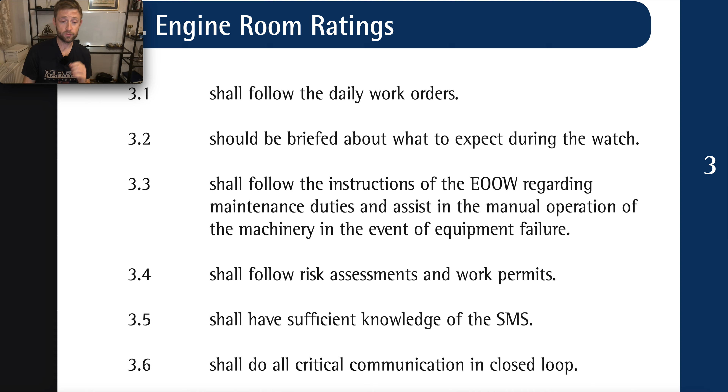3.5, engine room ratings should have sufficient knowledge of SMS. SMS knowledge is always available - it's about the level of motivation each individual has to read it. I know there's a lot of information, but take your time, step by step, one thing per day is more than enough.

By years, if you're still in this industry, you will have built knowledge and a set of skills that will give you a better understanding of why we do things, and how we're able to create less risky activities - improving, identifying things on the ground, and having clear structured communication between the people assigned for a specific job.

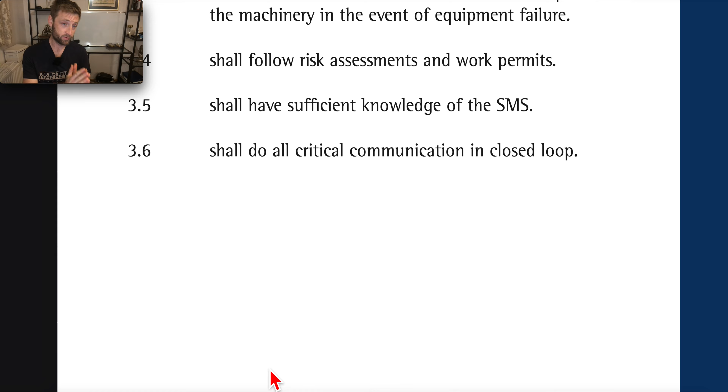Engine room ratings shall do critical communication in closed loop.

Let's go a little bit down. Whoop, okay. Let's continue - engine room crew.

All members in the engine room crew shall be familiar with their assigned duties. In addition, every member should at least have knowledge of the use of appropriate internal communication systems, like phones, information, escape routes from machinery spaces, the location and use of all types of firefighting equipment, engine room alarms, damage control gear in the machinery spaces, together with their use and the various safety precautions to be observed. That's a huge variety of equipment that has to be learned.

Also, a very good thing is that senior officers take part in continuous training, showing the things, explaining how they are and for what reason, and creating an atmosphere where all members feel valued and their voice is heard. This is very important, so everyone can ask freely without fear that not knowing will have some negative impact.

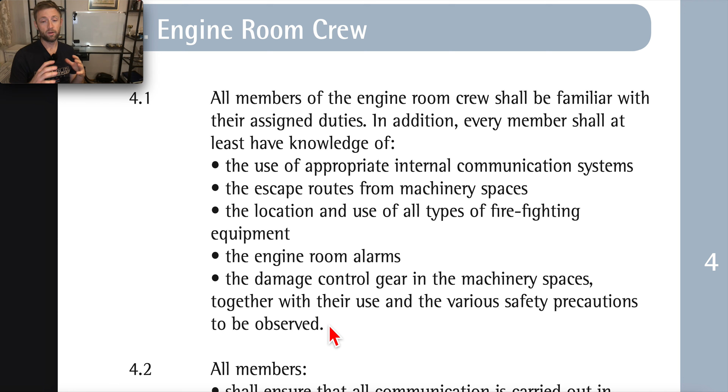Let's go to 4.2. All members shall ensure that all communication is carried out in a closed loop and shall always comply with the chief engineer's standing orders. One of the things I have seen is that the clearer standing orders and special orders, more to the point and not generic, the much better the setup of the team and all the members will be.

So it should be clear exactly what they have to do in each individual situation, in the daily activities, the reporting system. And it's very important to give each and every individual, all the members, a discussion about how they see it. Are they able to do that? Do they feel fine with that? That brings clarity to all the members, and they are also able to give you feedback.

So I believe it should be open and transparent communication with all the members, without fear, like we are talking at home, okay? Even if they are strangers, we should create a place where we feel like, let's say, a family.

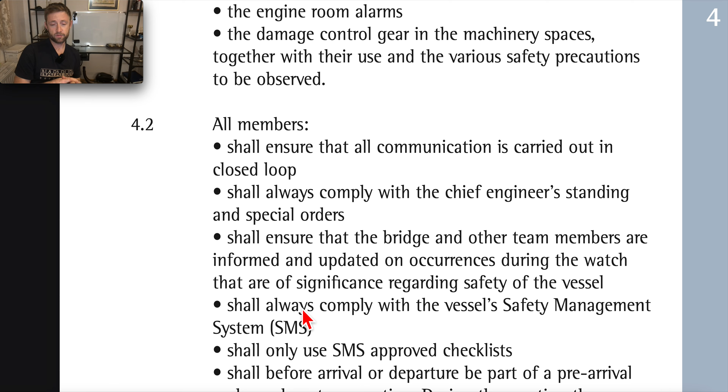So all members shall ensure that the bridge and other team members are informed and updated on occurrences during the watch that are significant regarding the safety of the vessel, shall always comply with the vessel safety management system, and shall always use SMS-approved checklists. Yes, the checklist should be approved, this is very critical. Do not create your own checklist, that creates additional work and it's not required.

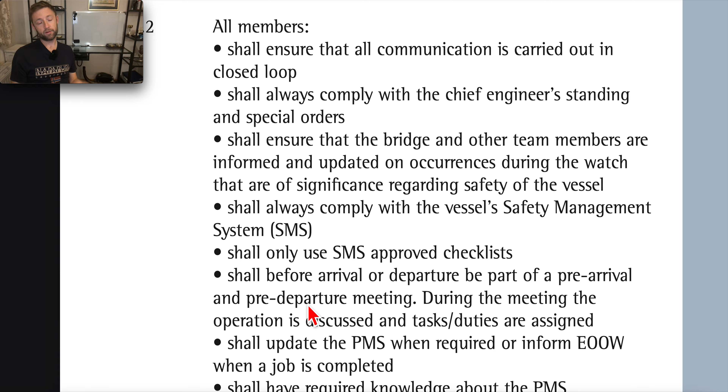All members shall, before arrival or departure, be part of the pre-arrival and pre-departure meeting, so everything should be discussed. During the meeting, the operation is discussed and the tasks and duties are assigned. They should have a clear understanding of what they will do and where they will be positioned. And I have seen that the clearer the discussion made with all the members, the clearer their understanding of what the operation will be, what they have to do, how long it will take, what to do next. The workflow becomes much better, much safer, much more transparent, and we only have benefits from that way of working.

Shall update the PMS. All members shall update the PMS when required, or inform the engineer officers when a job is completed. So if the job is completed, the engineer officer is informed and will have some passwords. From my side, I believe everyone should know the PMS system and everyone should have access to it, so they start to learn and introduce themselves to how a PMS system works, how they can see the jobs, and gain better understanding, because a well-structured PMS system also has instructions on how to do the job, and all the necessary documentation required to create all the permits and assessments. So I believe a well-structured PMS system will also be the integration of the SMS, of what the SMS says.

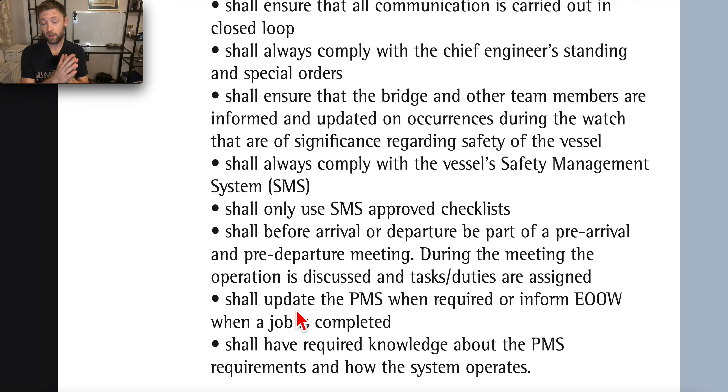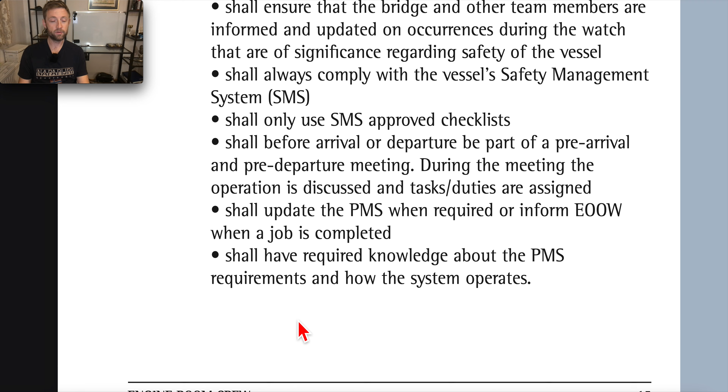All members should have required knowledge about PMS requirements and how the system operates. I believe it is continuous training. The training does not stop. Since you are there, in any kind of company, whether onshore, on board, or in manufacturing, you never stop learning.

It is a continuous set of training sessions and discussions between the members, between the crew, that will create a space of shared experience, shared knowledge, and this will boost everyone to a better understanding and getting the feedback that is so required in order to improve the systems that we are building.

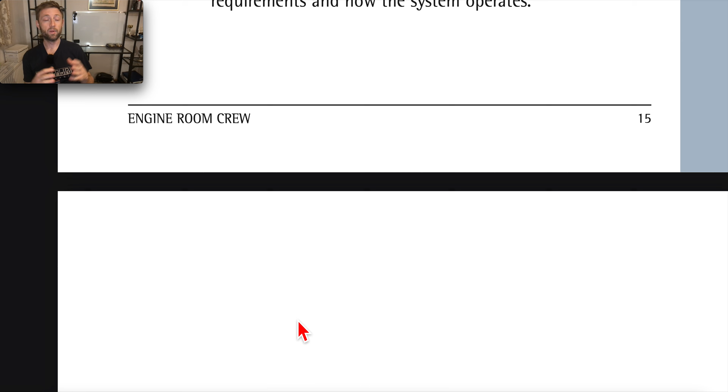Because without the proper feedback, without a reversal flow of information, we are not building a system which is continuously improving. We are building just a system of authority, which we do not like. We are not living in the 19th century. We are progressing, and the systems nowadays require a much more broad way of understanding things. It needs flexibility, it needs additional resources which can only thrive in this kind of structure.

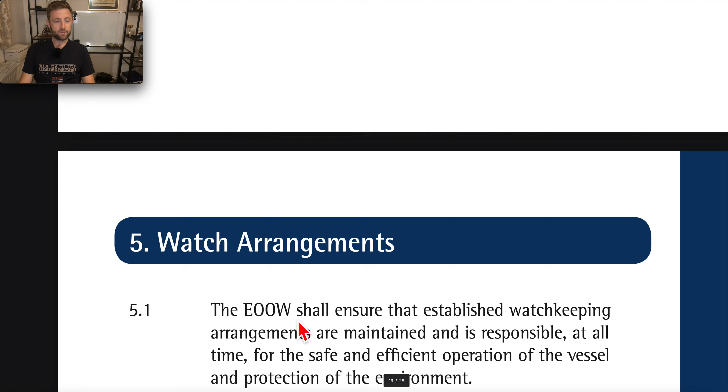So let's see about the watch arrangements. The engineer officer on watch should ensure that established watchkeeping arrangements are maintained, and is responsible at all times for the safe and efficient operation of the vessel and protection of the environment.

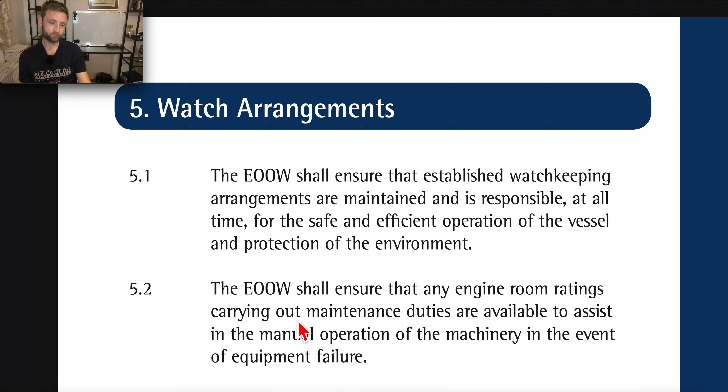5.2, the engineer officer on watch shall ensure that any engine room ratings carrying out maintenance duties are available to assist in the manual operation of machinery in the event of equipment failure.

And that's the reason why you should teach the person working with you, so they will be familiar and sure of what to do, even in the event of operating a valve, such as closing and opening - they know exactly what to do and at which time. This is really important, because one person cannot do everything. That's why the vessel itself is a team of people that actually bring the vessel to where it should be.

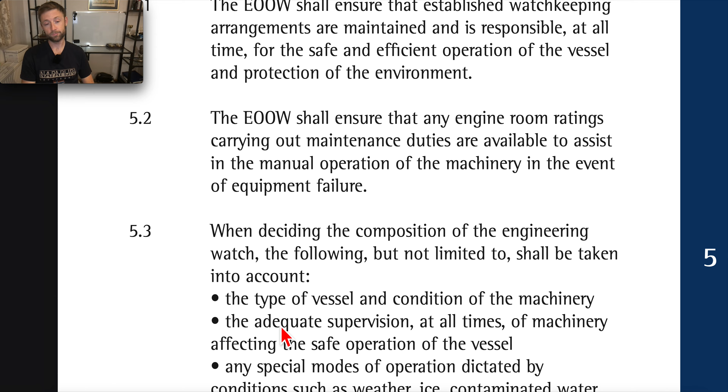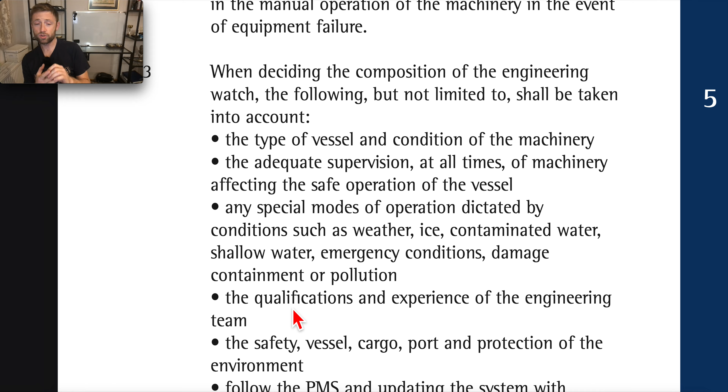5.3, when deciding the composition of the engineering watch, the following, but not limited to, should be taken into account: the type of the vessel, the condition of the machinery, adequate supervision at all times of the machinery affecting the safe operation of the vessel, and any special modes of operation dictated by conditions such as weather, ice, contaminated water, shallow water, emergency conditions, damage containment, or pollution.

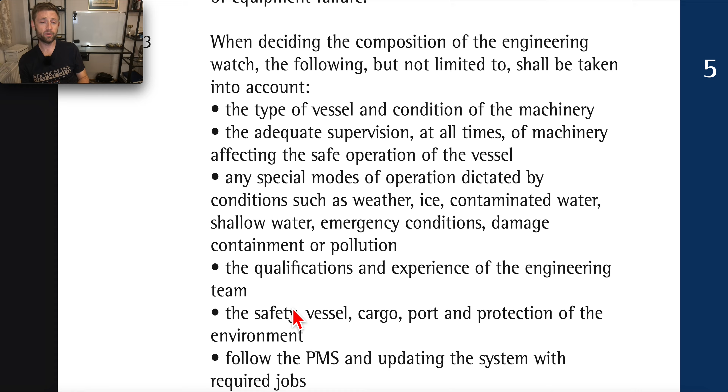So there are different scenarios and different compositions can be decided by the chief engineer and the captain on how the structure will be. This affects the qualifications and experience of the engineering team, the safety of the vessel, cargo, port, and protection of the environment. So there are various things that can affect the decision.

Follow the PMS and update the system with required jobs, observe international, national, and local regulations, and maintain the normal operation of the vessel.

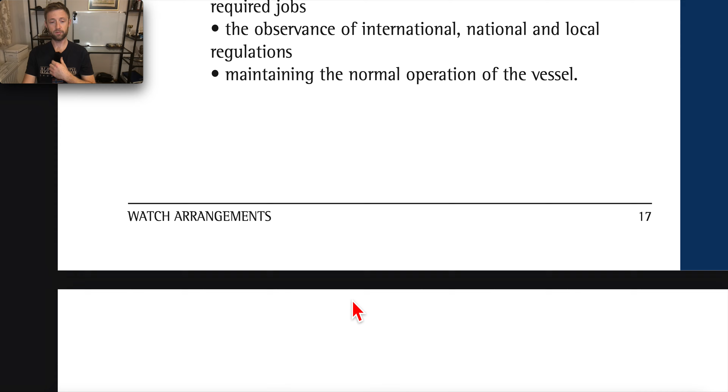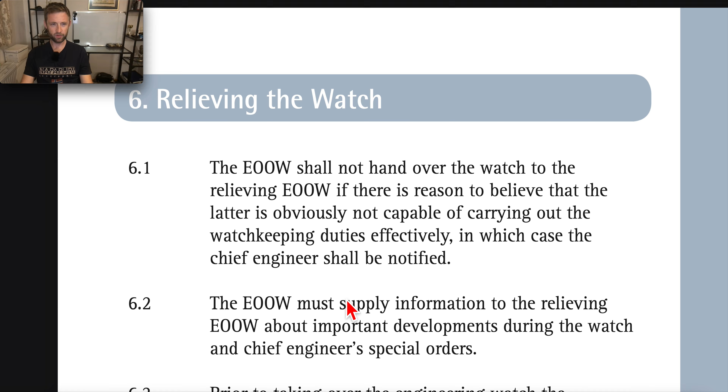I believe tomorrow we will do a video about relieving the watch, and I will share a story I have about that, along with some experience - one from the tanker and one from the passenger vessel. So tomorrow I will make this video, hopefully in the morning or at noon, and I will share my own experience.

Experience from the sea - two cases for relieving the watch. It is completely different, and I will explain, based on the information we have here, how it affects in both cases the people and the vessel itself, but also the people related to the watch. The watch itself is a really critical thing, and all the things from taking the watch to relieving it have a huge impact on how the vessel operates.

Let's do it tomorrow. Absorb the information I've provided today. Probably you already know it, but if not, maybe some of this information will help you adopt more easily and see how things work for the ratings and engine room crew. Just take it easy, step by step, rewatch the video, or share it with people you think it will help.